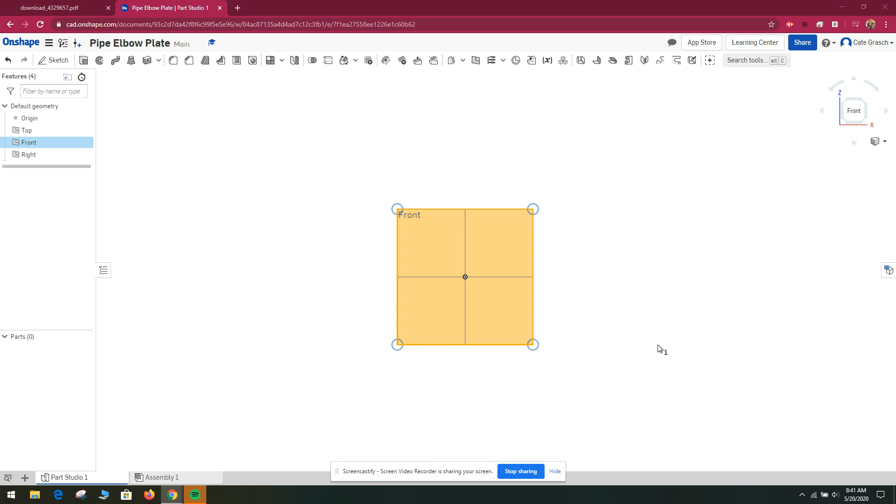All right. So we're going to start with these plates. If you look at them, they're 360 by 360, so it's just a square. They're both exactly the same, and all of the features are symmetrical. So what I'm going to do is I'm going to start that plate, and then I'm also going to make sure I do my rounded corners.

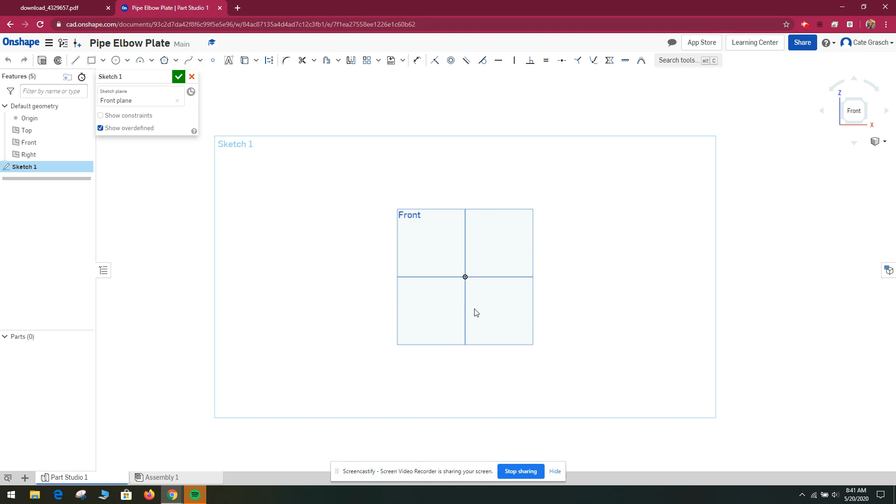So I have the front active. I want my sketch to be on this front. It already has it listed, right? And then I'm going to just start a rectangle. Now I'm going to make this 360. You'll see it'll go out of frame, but you'll also notice that this side didn't stay teeny. It kept the same ratio. So if you had something that was in proportion, it would still stay in the right proportion, even if you changed the parameters of one side.

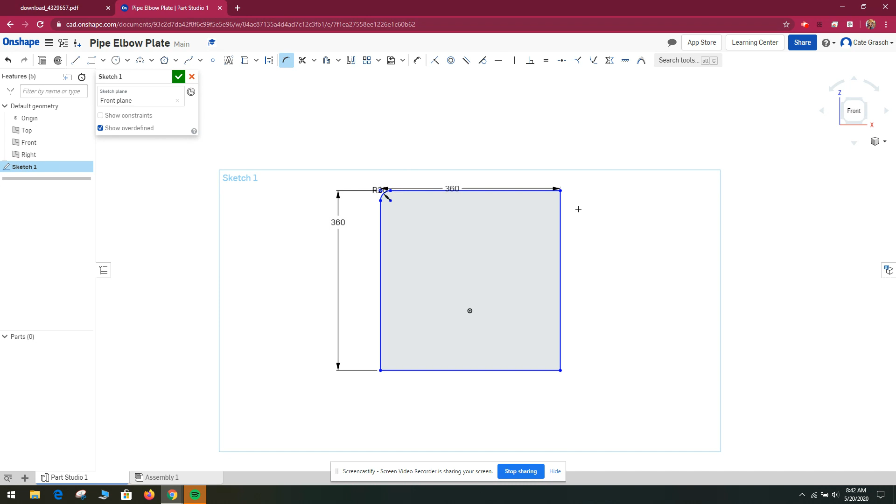Second thing I need to do is this 20 radius. So I'm going to come to my sketch tool here for my fillet, and I'm going to click my two lines that'll be affected. And then I already had done this once, so my 20 is already there. And then I should be able to just come along to all of them and have that again, just like we did with the slide lock. And then once again here. Oops. Okay. And then here you go. Okay, enter that in. So here's your plate.

So then what we need to do is place our circles. So I think what I'll do is I'll do an offset. So here's my offset tool. If I want to offset this, it's going to ask me how far. And yes, I want to go, nope, I want to go in that direction. Yes. And then I want it to be 50 over. Oops. Okay. And then I'm going to have the offset tool still active. I'll select this. I want it to go in. Yes. And it'll ask me, I want it to go 50. Now this will be where my circle starts.

Okay. So I go back over here. The circle that is my inside circle has a diameter of 30. Okay. So that's my through circle. I'm going to do the through circle first. So I'm going to go ahead and make sure that's active. And I'm going to pull out a circle. And now I could do it on all of them. I could mirror them across. So let's try mirroring them in a moment. So let's make sure that this diameter is going to function for us. It needs to be 30.

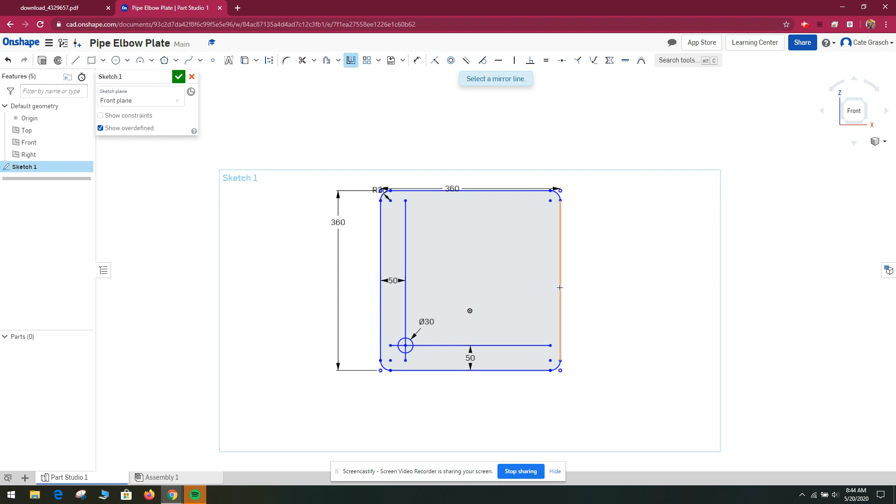And then what I'm going to do is I'm going to say, can I mirror it? So let's try it. Oh, my mirror line is going to be the midpoint. I can't get that to come up. Oh, shoot, sorry. I want it to be the middle of this line. So, because it's not centered, if I did, yeah. See what's going to happen. If I say that and then I say this, it'll mirror it over there, which is not my intent. So let's see if I can do this. Okay, let's not do it that way. You can do it. It's just set up a little bit differently.

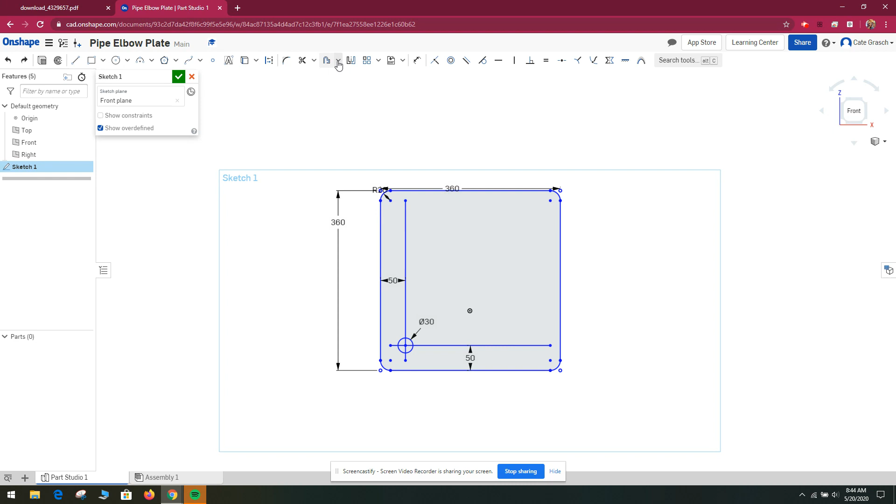So I'm just going to do my reference lines, my offsets from here. Yes, and do it 50. For me, it's a little counterintuitive, and so it's not doing what I want it to do, basically. So I'm going to enter and then really hope that it starts functioning better. Okay, so then here's all my cross points. Okay, so now you can just come in here and do your circles. It doesn't really matter the size. It should stay active right at that crossing point, right at this crossing point. But we don't need to.

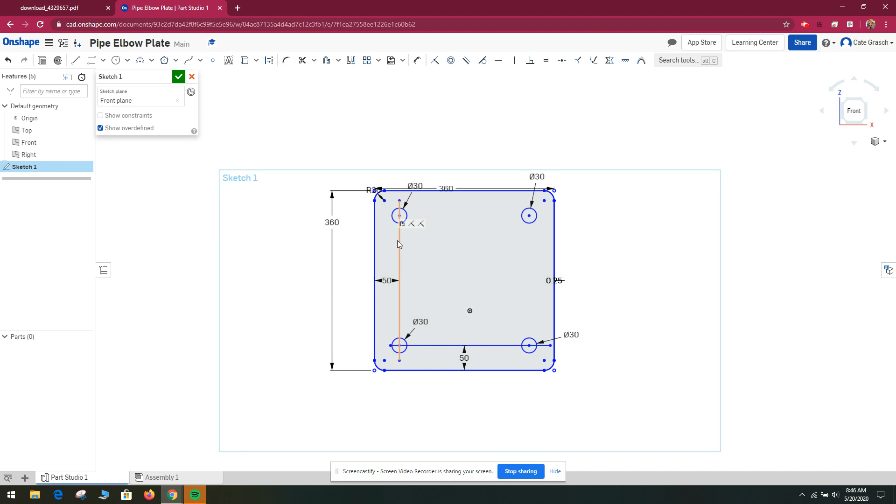All right, so then we're going to come in here and make sure all of them are 30. Okay. This one, I want that to be 30. And I want this one to be 30. Okay. And having these dimensions here will just let you keep them and make sure that everything's exactly how you want it to be. So make sure you're off a tool, and then delete some of these extra pieces. Now you could use the trim tool for this, but if you use the trim tool for this, anywhere there's a crossing line, it's going to cut it. So at this point we have the plate with the circles, the smaller of the two circles.

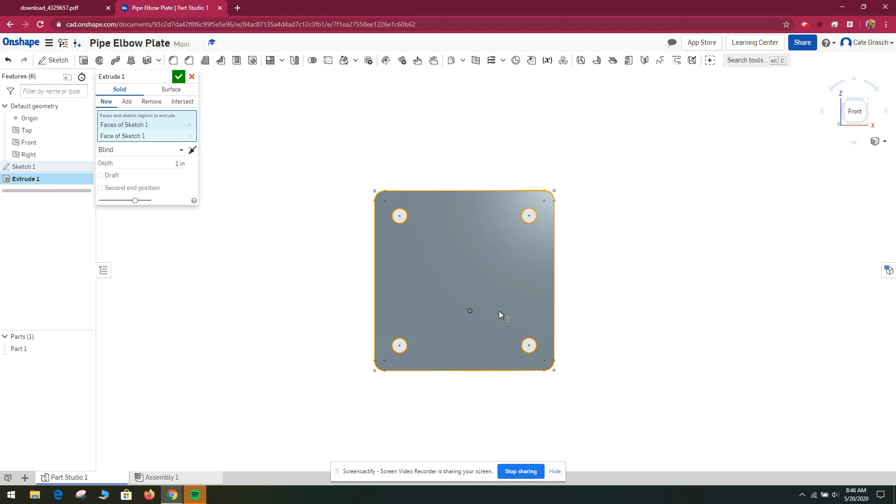So what I'm going to do at this point is I'm going to extrude this, and I want to extrude it 50. Okay. I want the whole thing to extrude, and you can turn it to make sure it's doing what I want it to do, which I think I want it to come up. Let's make sure it's doing what I want it to do. Let's do this. It needs to be 50.

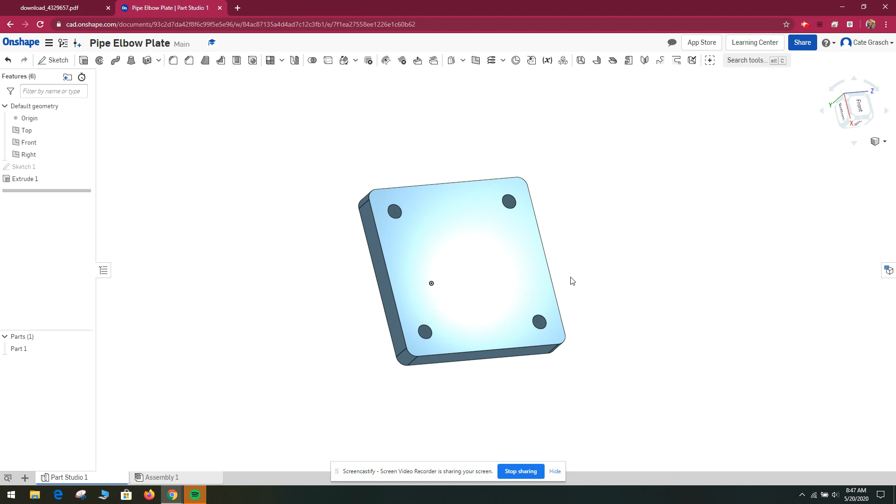Okay, I'm gonna say yes. Okay, there it is. Pretty happy with that. So then what I'm going to do is on this face, I'm going to make a... let's see if I can, okay. You can also do a crossing and select it all, which is nice, and it tells you how many pieces you have with it.

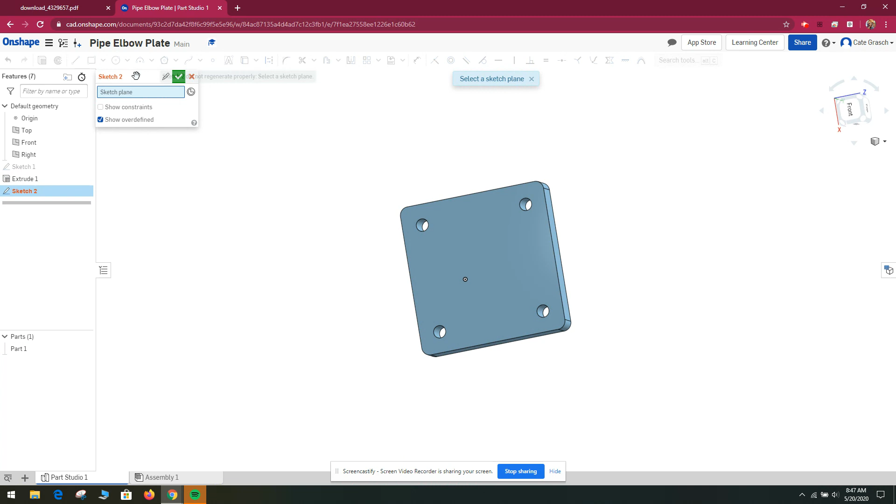So now I'm going to do another sketch. I'm going to select this face for my sketch. I don't want to extrude anything. My sketch plane is here, and it's already showing it's there, right?

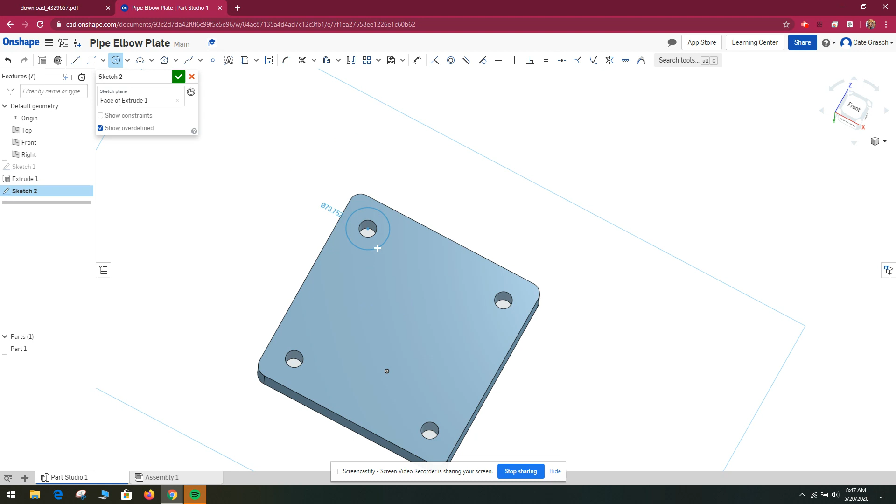So now what I'm going to do is my outer circles, because I'm just going to push them down, and I'll show you how to remove them. They are 60 in diameter. So if I go from the center and come out, okay, whoa, I should be able to do all 4 of them relatively easily. Then again, I'll come and use my dimension to make sure that these are all doing what I want them to do.

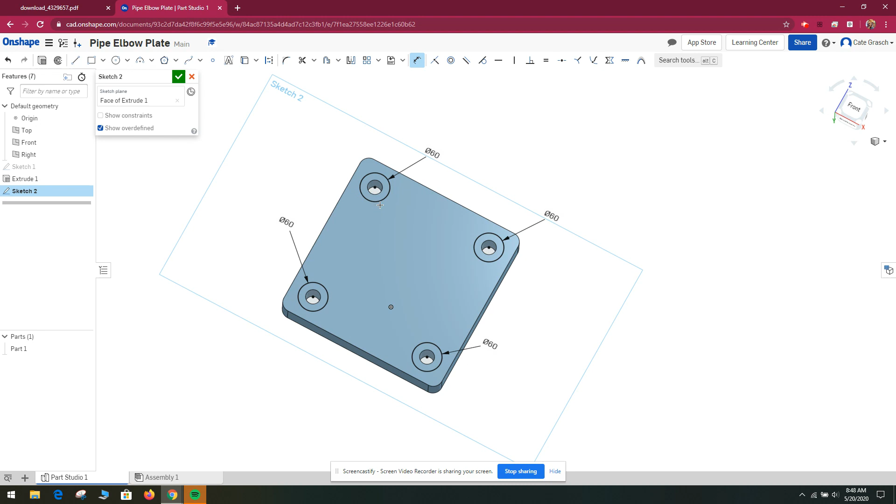Now these aren't going to stay in relation to each other like the other ones, because they aren't touching. They are separate entities. So now what I'm going to do is extrude these down, and I'm going to say I'm good with that sketch.

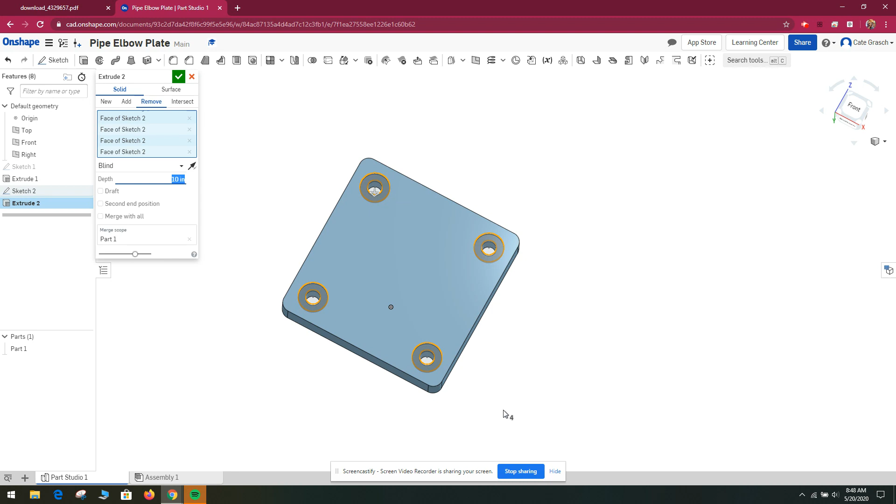Then I'm going to say extrude, and I'm going to want to extrude this one. Make sure you get this inner circle and the outer, but I want it to extrude down, and I want it to remove, not add, remove. And then I want it to remove down 10. So then when you say okay, you should have this little indent, and that'll be perfect, right?

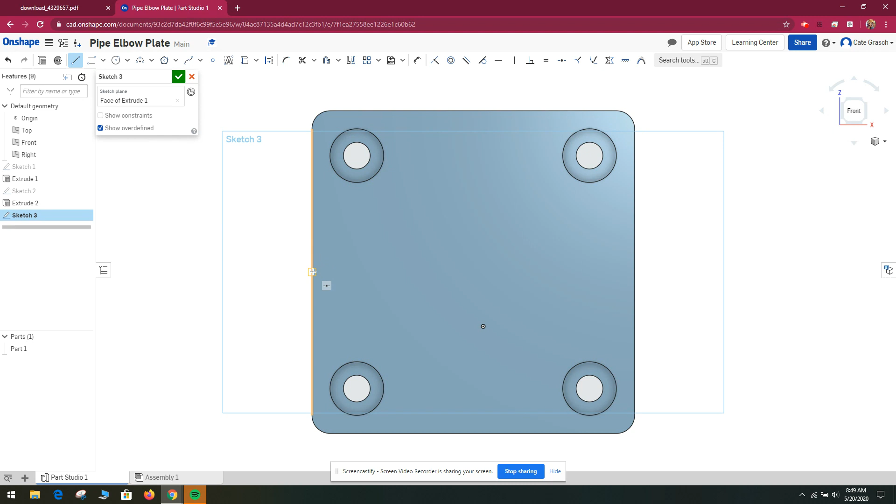The last thing you need to do is turn it to this front side for this. And what I'm going to do is start a sketch. It's going to be on this face plane. Then I'm going to use my reference lines to make a line go straight across this way, and another line to go straight across down the center.

See that little box? The center of this. And you can see, whoops, I don't want that, I want this. This will be my center point for creating this circle here. Now, if you look at this circle, the only indication it gives you of the size of it is right here on the side, on this section view.

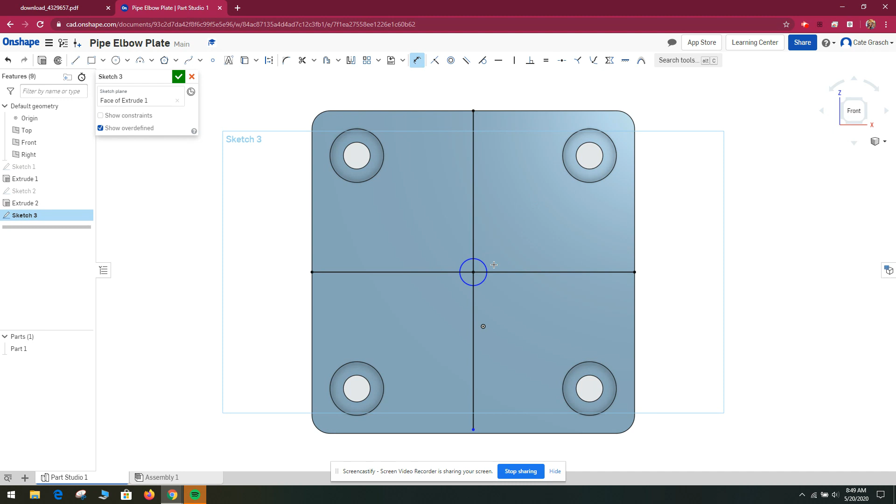So at 210, I'm going to make a circle. This is in my center point, and it doesn't matter how big it is. Did I say 210? Now I can't remember what I said. Yes, I did. Yay.

So select, drag it out, and this should be 210. So now, with no tool selected, I'm going to select these reference lines that I created earlier, and I'm going to delete them.

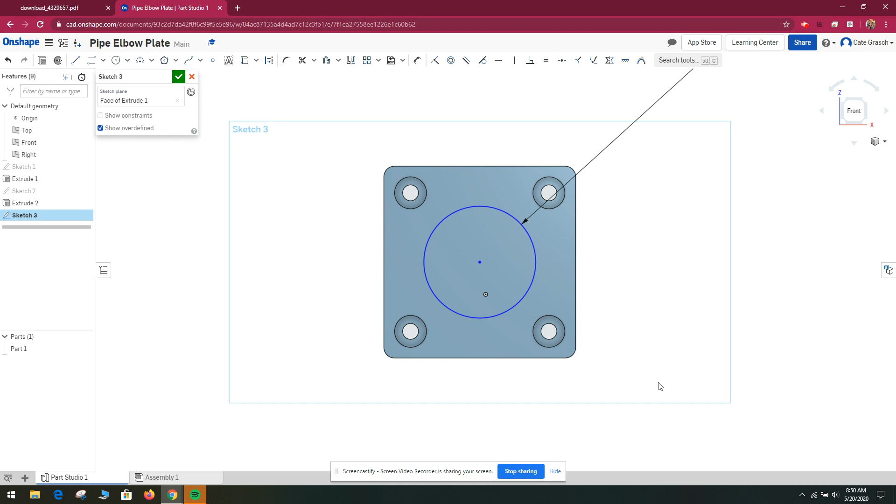Then I'm going to do another extrude. I'm happy with that sketch, so I'm going to extrude just this, but I'm going to extrude it down. You can extrude it however you want. This needs to be more than, it needs to be at least 50 or more. And we want to remove it because we want a hole in this. So I'm going to hit remove, and now I have my hole.

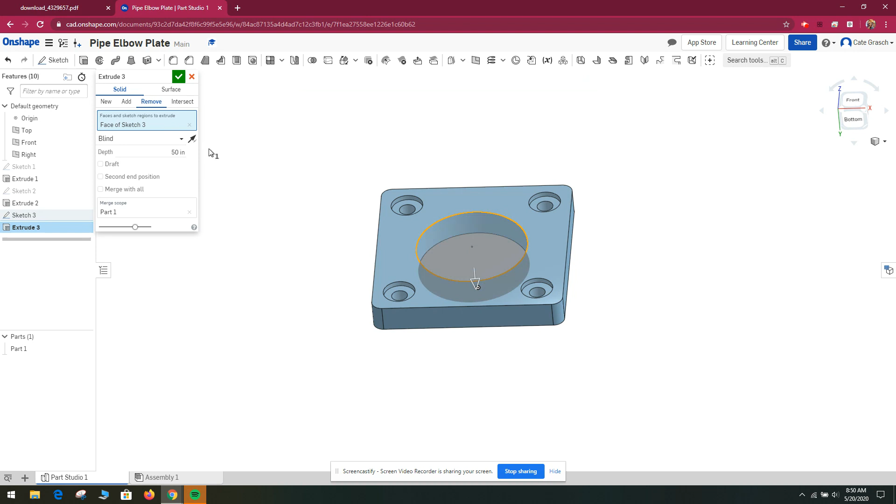There is a hole tool. I don't find it as easily as, say, this mechanism. So I'm just going to stick with that.

And then let's see if we can use our chamfer. Now, if you look at it, it's a 10 by 10 chamfer. If it was 2 different sizes, it would look like 2 different distances, and it would tell you. Okay, so here we go.

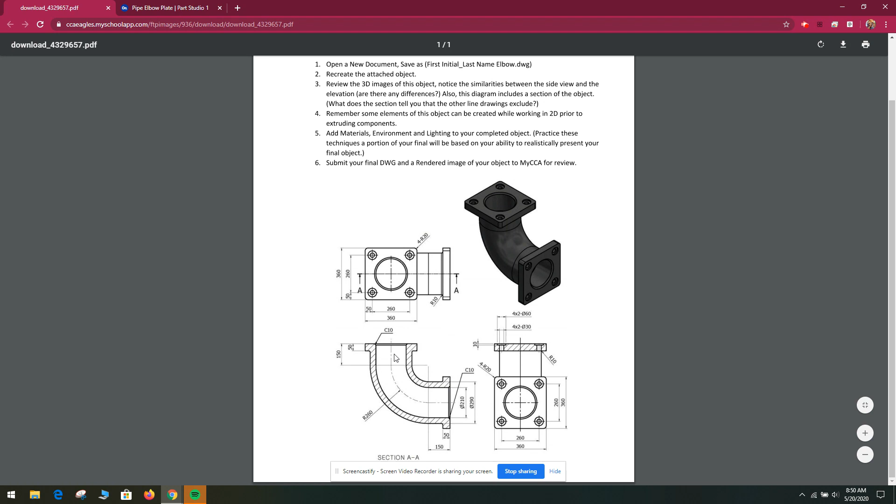We're going to do this chamfer. Now, again, if you hover over these, they're going to give you a little bit of what it is, or what you need to do. So I'm going to select this edge. It's going to say 0.2, but I don't want that. I want the whole thing, and I want it to be equal distance. So you do have options here, but we want equal.

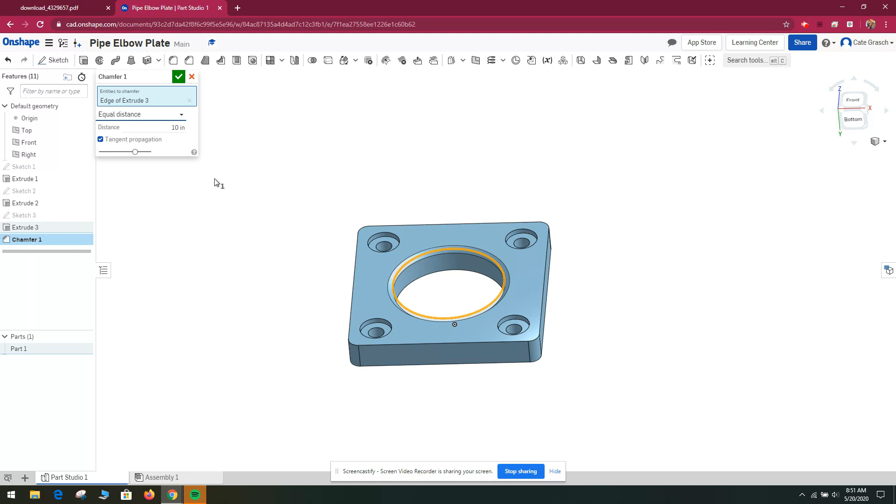Okay, enter, enter, say okay, and here is your plate that we just created. So we'll have 2 of these in the end, but right now we're just going to stick with the one, okay, to get you started.